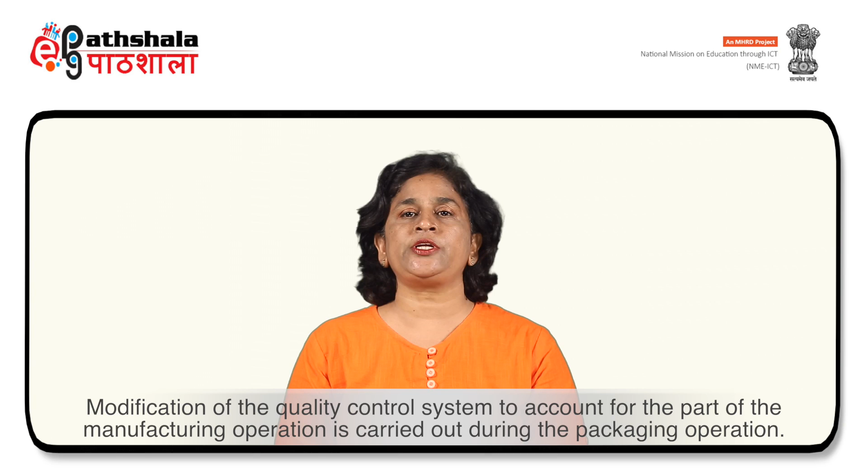Requirements for the preparation and packaging of pharmaceutical aerosols include special knowledge, skills and equipment, strict supervision and adherence to rigid quality controls, modification of the quality control system to account for the fact that part of the manufacturing operation is carried out during the packaging operation, the equipment used for compounding of liquid suspensions, emulsions, creams and ointments, and specialized equipment capable of handling and packaging materials at relatively low temperatures or under high pressure.

First of all, we will discuss the filling apparatus of pharmaceutical aerosols. There are three types of filling apparatus which include pressure filling apparatus, cold filling apparatus, and compressed gas filling apparatus.

Talking about pressure filling apparatus first: it comprises a pressure burette which meters small volumes of liquefied gas under pressure into an aerosol container. Pressure filling equipment that fills through pressure fillable metered valves is available. The pressure filling method comprises various steps, involving the addition of the propellant through the inlet valve located at the bottom or top of the burette.

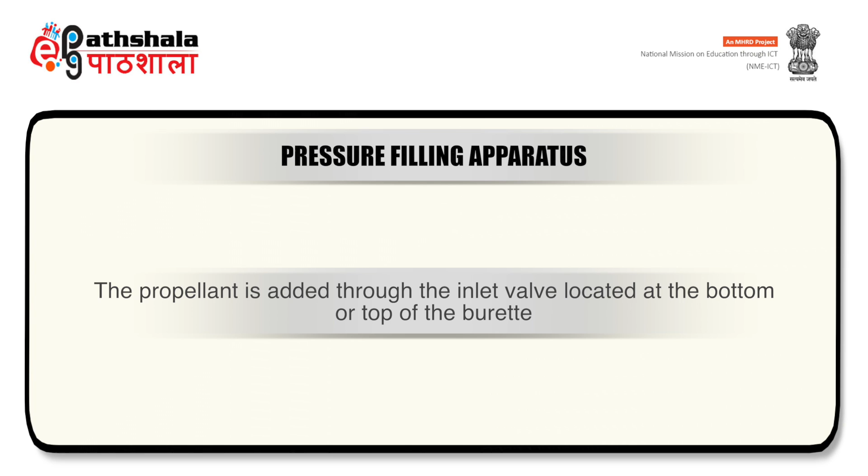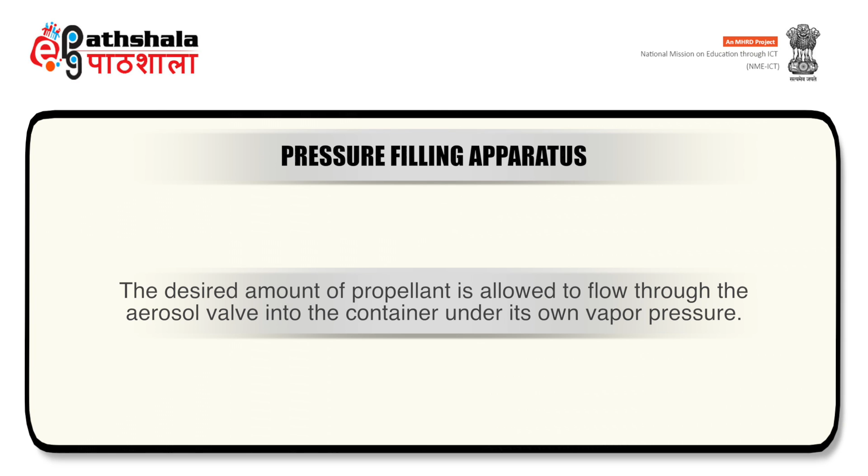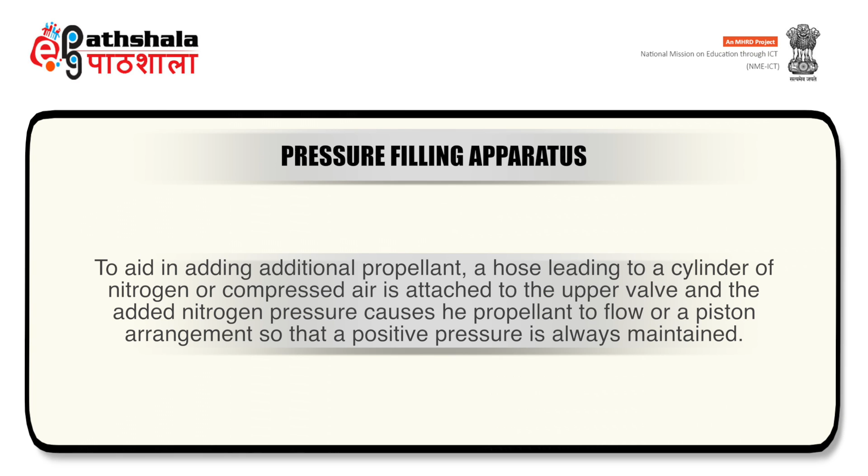Trapped air is allowed to escape through the upper valve. The desired amount of propellant is allowed to flow through the aerosol valve into the container under its own vapor pressure. When the pressure is equalized between the burette and the container, the propellant stops flowing. To help in adding additional propellant, a hose leading to a cylinder of nitrogen or compressed air is attached to the upper valve, and the added nitrogen pressure causes the propellant to flow, or a piston arrangement is made so that a positive pressure is always maintained.

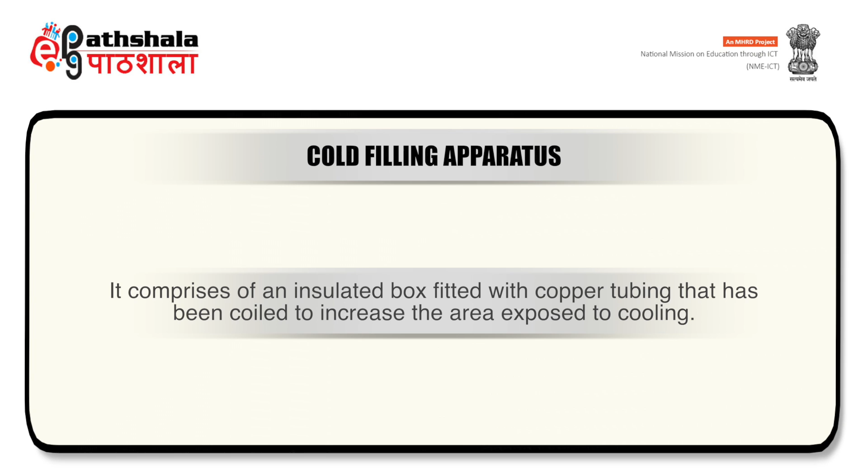Now talking about cold filling apparatus: it comprises an insulated box fitted with copper tubing that has been coiled to increase the area exposed to cooling. The unit must be filled with dry ice or acetone prior to use. This system can be used with metered valves as well as non-metered valves. However, it should not be used to fill hydrocarbon aerosols because an excessive amount of propellant escaping and vaporizing may lead to the formation of an explosive mixture. Fluorocarbon vapors do not form explosive or inflammable mixtures.

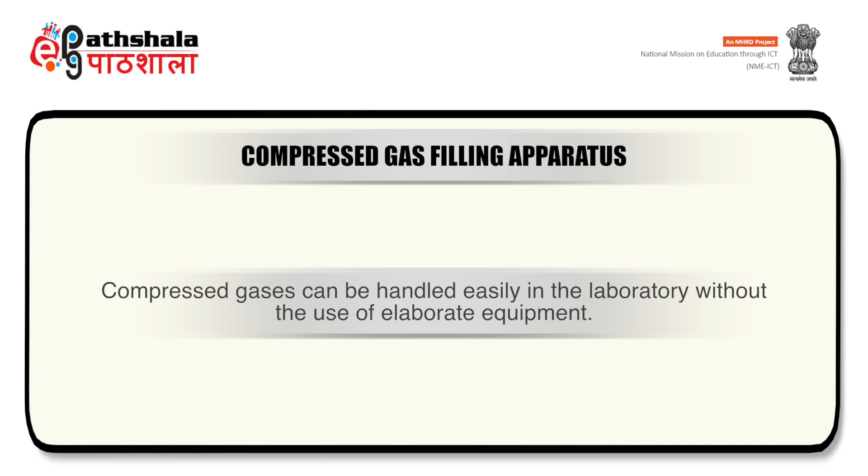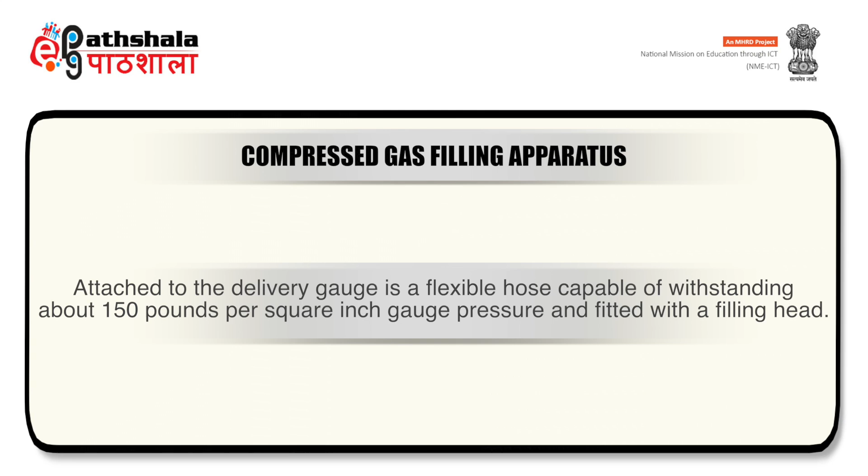Now the compressed gas filling apparatus: compressed gases can be handled easily in the laboratory without the use of elaborate equipment. Since the compressed gases are under high pressure, a pressure reducing valve is required. A flexible hose is attached to the delivery gauge and is capable of withstanding about 150 pounds per square inch gauge pressure, and is fitted with a filling head. More elaborate units utilize a flow indicator between the gauge and the flexible hose.

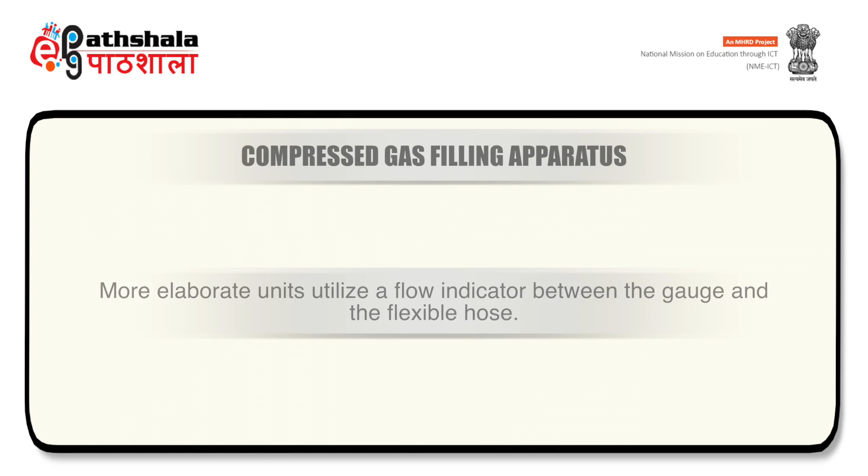Working of the equipment for filling aerosols with compressed gases involves various steps, including the placement of the concentrate in the container, the crimping of the valve in place, evacuation of the air by means of a vacuum pump, insertion of the filling head into the valve opening, and the depression of the valve so that the gas is allowed to flow into the container. When the pressure within the container is equal to the delivery pressure, gas stops flowing.

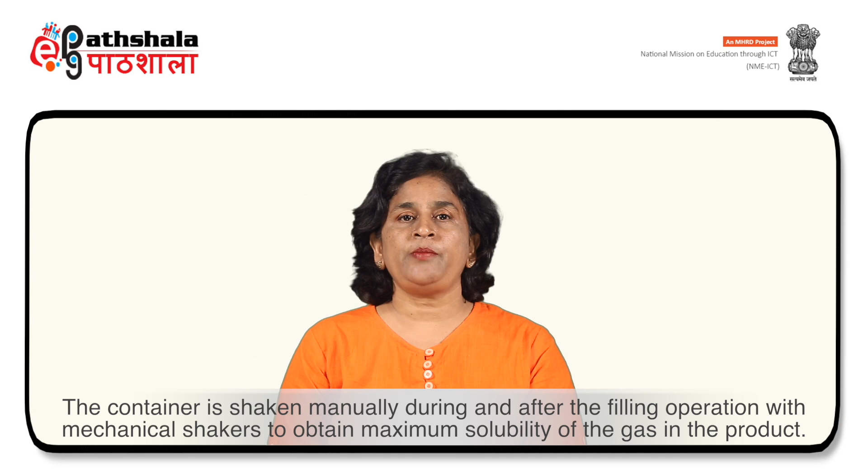Then the container is shaken manually during and after the filling operation, or with mechanical shakers, to obtain maximum solubility of the gas in the product. For products requiring an increased amount of gas, or for those in which solubility of the gas in the product is necessary, carbon dioxide and nitrous oxide can be used.

After having discussed the various filling apparatus used for pharmaceutical aerosols, now it is a turn to discuss the large scale equipment used for the manufacturing of pharmaceutical aerosols. The large scale equipment comprises of concentrate filler, valve placer, purger and vacuum crimper, pressure filler, and leak test tank.

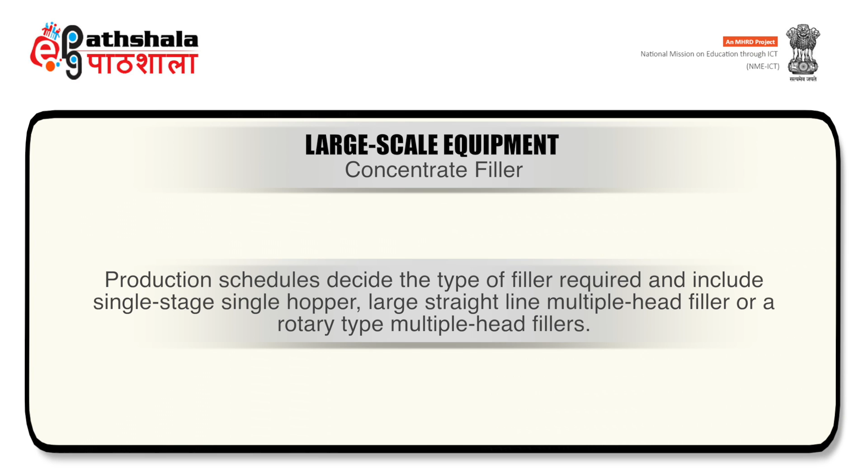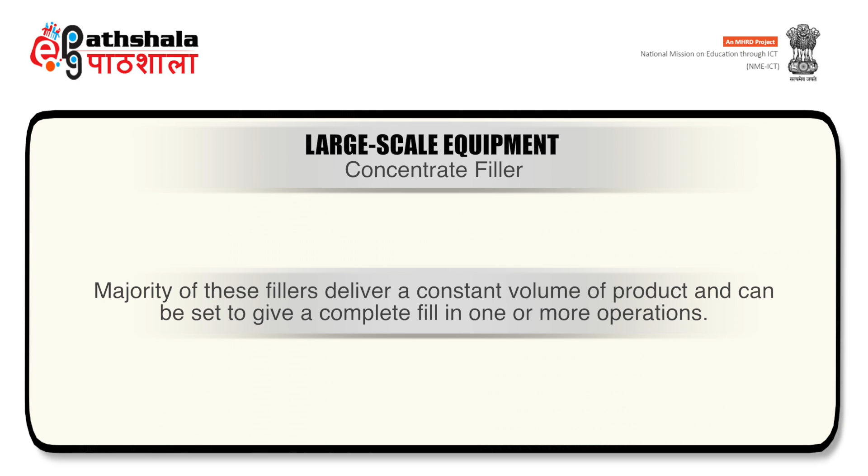Talking about concentrate filler first: production schedules decide the type of filler required, and include single stage single hopper, large straight line multiple head filler, or a rotary type multiple head filler. Majority of these fillers deliver a constant volume of product and can be set to give a complete fill in one or more operations. Generally, only part of the product is added at each stage, assuring a more accurate fill.

Now talking about valve placer: valves can be placed over the container either manually or automatically. High-speed equipment makes use of an automatic valve placer which orients the valve and places it in position prior to the crimping operation.

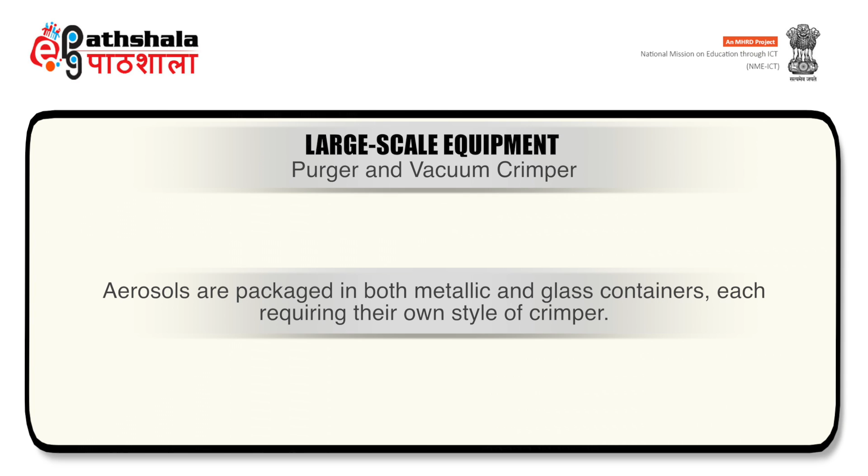Then comes purger and vacuum crimper. Aerosols are packaged in both metallic and glass containers, each requiring their own style of crimper. Combination can and bottle cappers can be used for most lab procedures and operate manually or on air pressure.

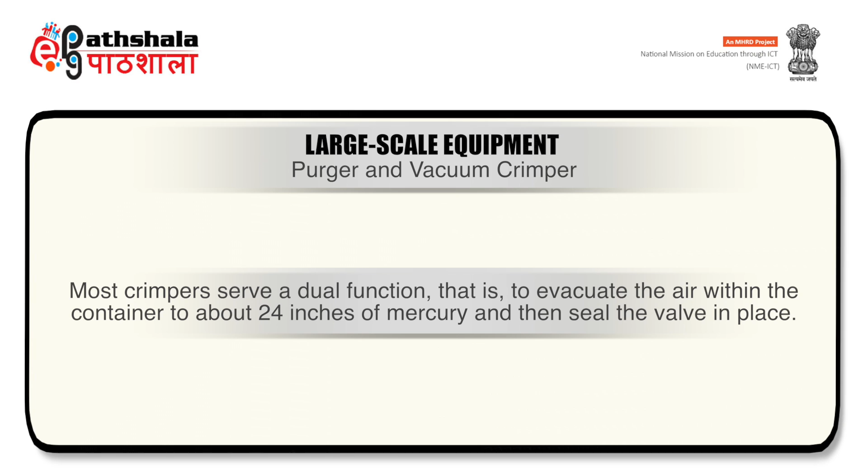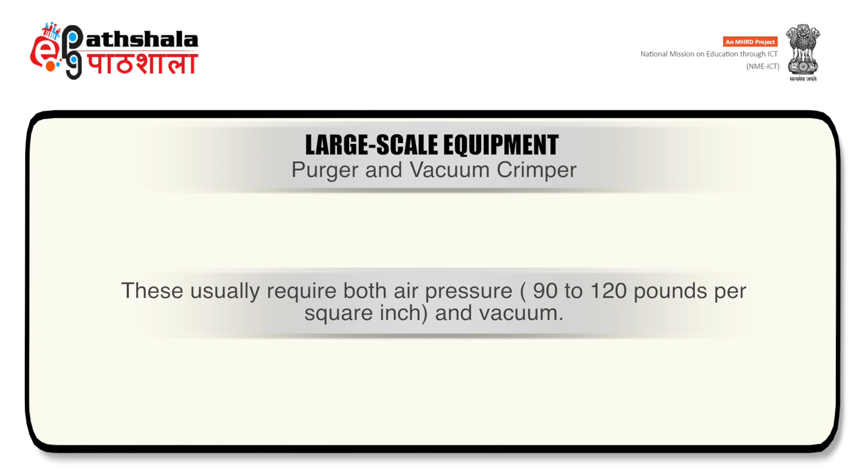These are capable of producing more than 10 to 12 cans per minute. Most crimpers serve a dual function, that is to evacuate the air within the container to about 24 inches of mercury and then seal the valve in place. Single head crimpers or multiple head rotary units capable of vacuum crimping up to 120 cans per minute are available.

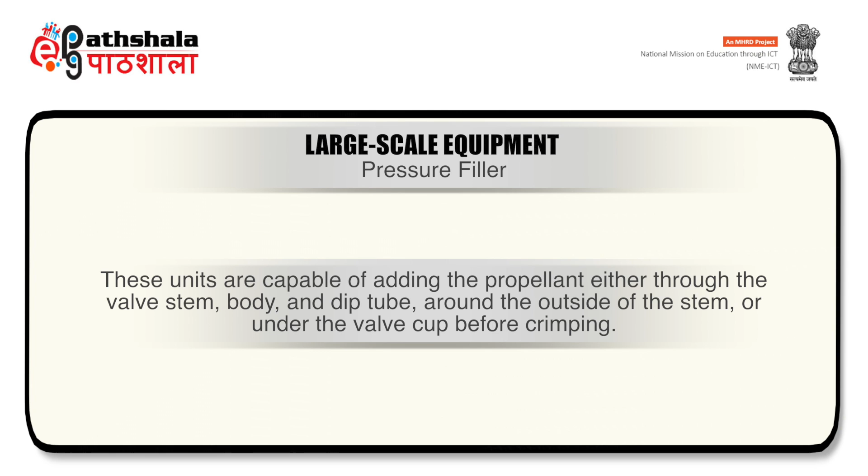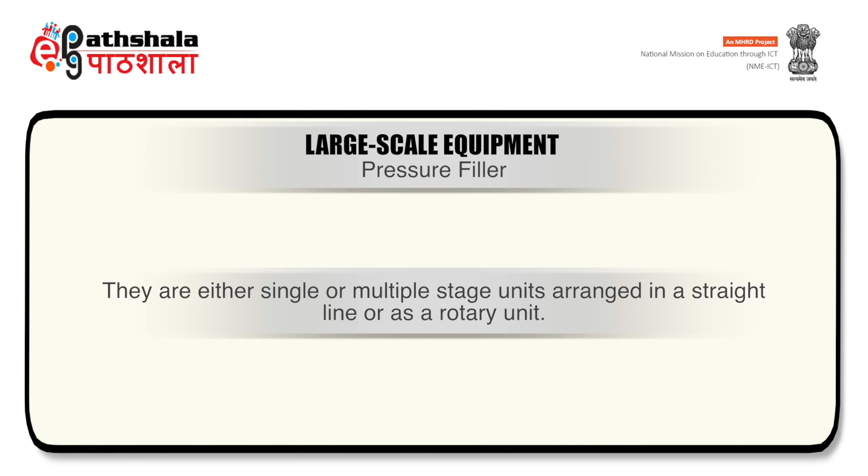These usually require both air pressure and vacuum. Now the pressure filler. Pressure filler units are capable of adding the propellant either through the valve stem body and dip tube, around the outside of the stem, or under the valve cup before crimping. They are either single or multiple stage units arranged in a straight line or as a rotary unit. To speed up production, a positive pressure is used to force the liquid propellant into the container.

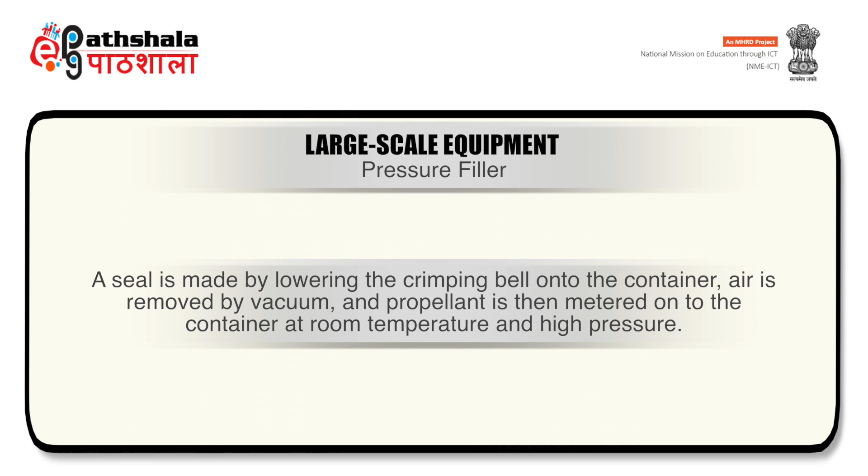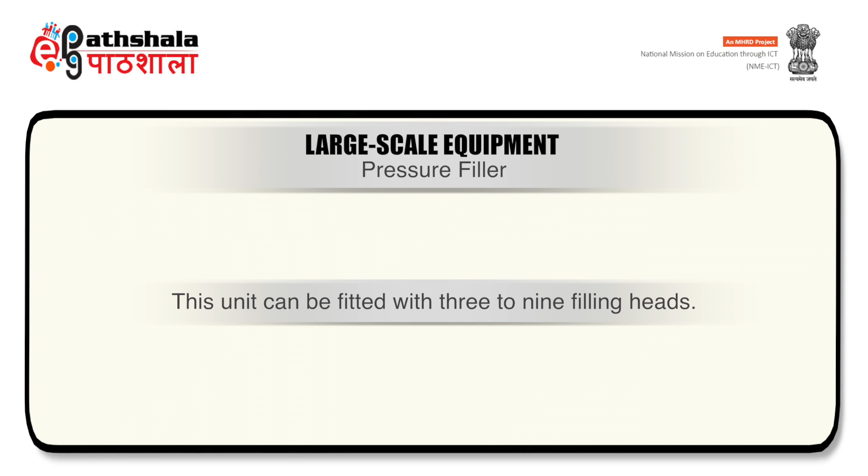Evacuation of air from the container, crimping the valve, and addition of the propellant can be achieved in basically one operation through the use of an under-the-cap filler. The pressure filling unit operates in a particular fashion which involves the following steps: a seal is made by lowering the crimping bell onto the container, air is removed by vacuum, and propellant is then metered into the container at room temperature and high pressure. The crimping collet expands and crimps the valve onto the opening. This unit can be fitted with 3 to 9 filling heads.

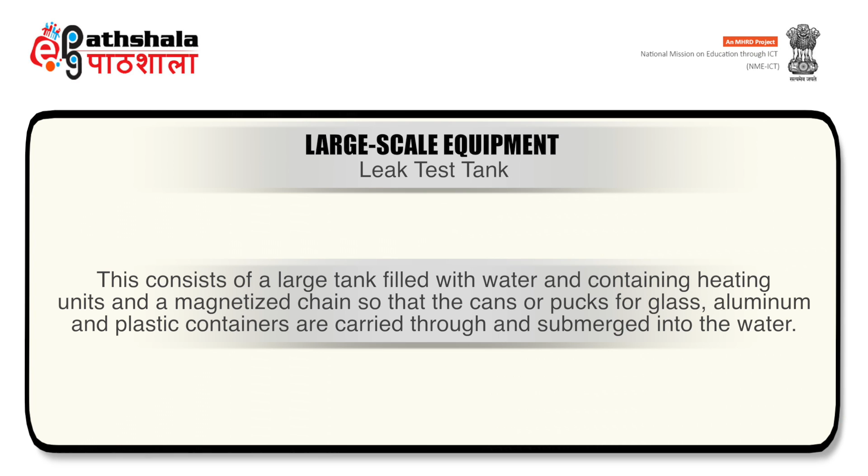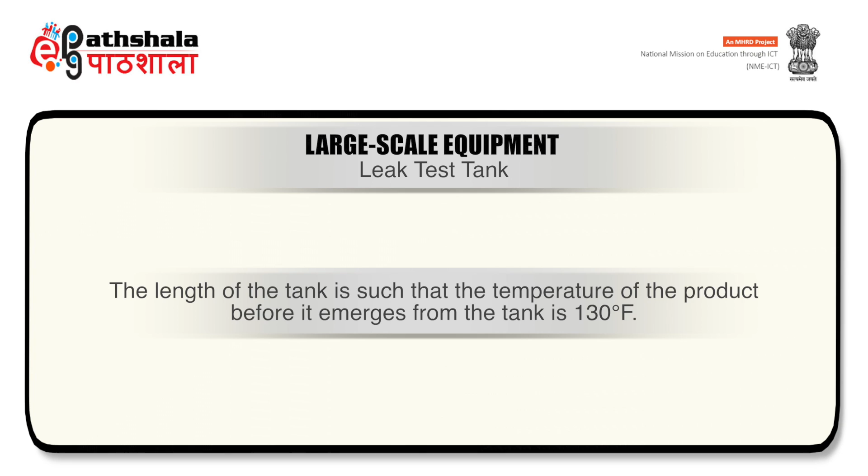Last but not least, talking about the leak test tank. This comprises a large tank filled with water and containing heating units and a magnetized chain so that cans, glass, aluminium and plastic containers are carried through and submerged into the water. The length of the tank is such that the temperature of the product before it comes out from the tank is 130 degrees Fahrenheit. According to DOT regulations, each completed container filled for shipment must have been heated until contents reach a minimum of 130 degrees Fahrenheit, or attain the pressure it would exert at this temperature, without evidence of leaking, distortion or other defects.

Now we shall discuss the manufacturing procedure.

Manufacture of aerosol products takes place in two stages, namely manufacture of concentrate and addition of propellant. Therefore, partial manufacturing operation takes place during the filling operation. Special quality control measures are required during filling so as to ensure that both concentrate and propellant are brought together in proper proportion. This we have discussed in the introduction. The aerosol concentrate is prepared as per generally accepted procedures, and a sample is tested to save time and money. A rejected batch is corrected instead of discarding, and thus loss of the other components is prevented.

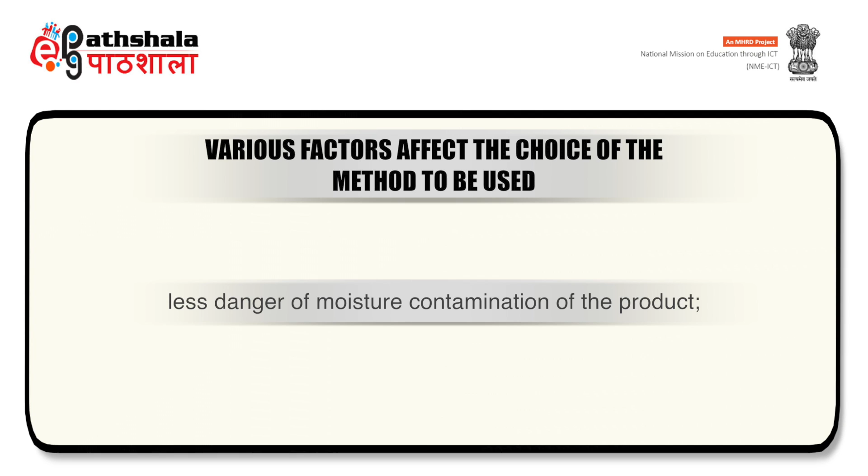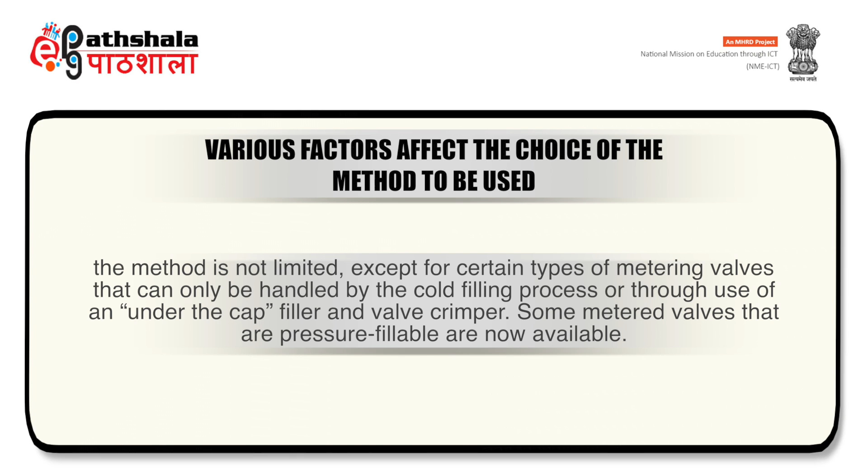Two methods which have been developed for filling aerosol products are pressure filling and cold filling. Various factors affect the choice of method to be used. The pressure method is usually preferred over the cold method because of the less danger of moisture contamination of the product, achievability of high production speeds, loss of less propellant, and the method is not limited, except for certain types of metering valves that can only be handled by the cold filling process or through use of an under-the-cap filler and valve crimper. Some metered valves that are pressure fillable are now available.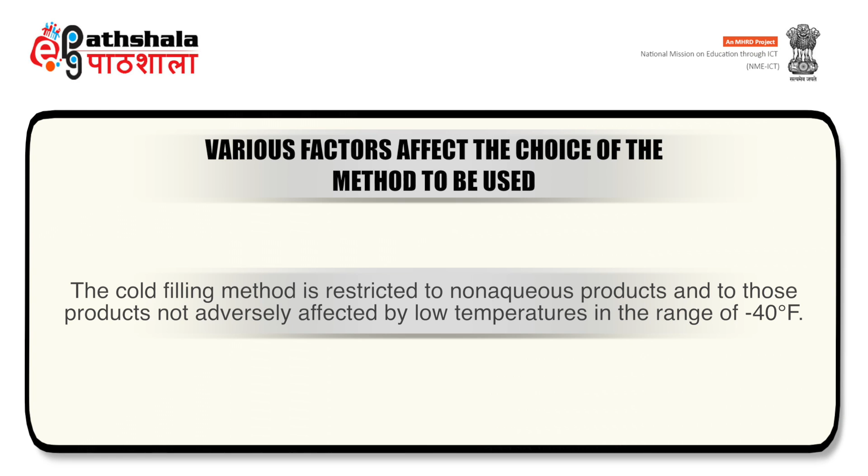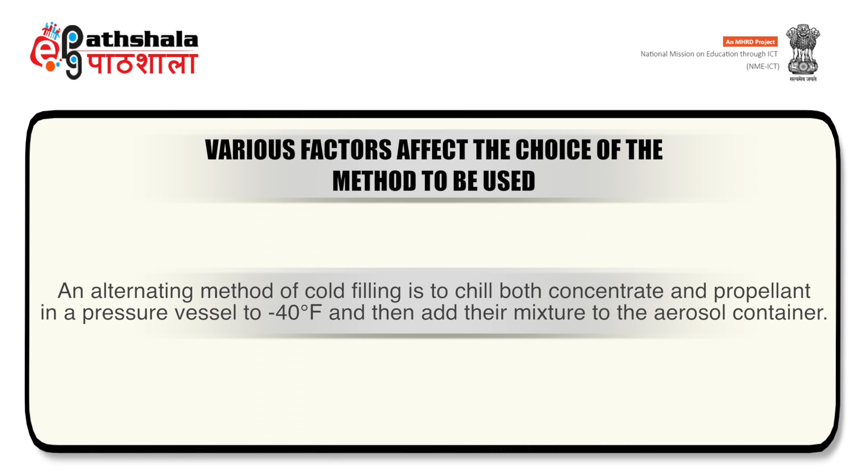Cold filling method, on the other hand, is restricted to non-aqueous products and to those products which are not adversely affected by low temperatures in the range of minus 40 degrees Fahrenheit. In this method, product concentrate is chilled to minus 40 degrees Fahrenheit and added to the chilled container. The chilled propellant is then added in one or two stages depending on the amount. An alternate method of cold filling is to chill both the concentrate and propellant in a pressure vessel to minus 40 degrees Fahrenheit and then add their mixture to the aerosol container. A valve is then crimped in place.

The container passes through a heated water bath in which the contents of the container are heated to 130 degrees Fahrenheit to test for leaks and strength of container. The container is air dried, spray tested if necessary, capped and labeled. This filling method is no longer used to any great extent and has been replaced by the pressure filling method.

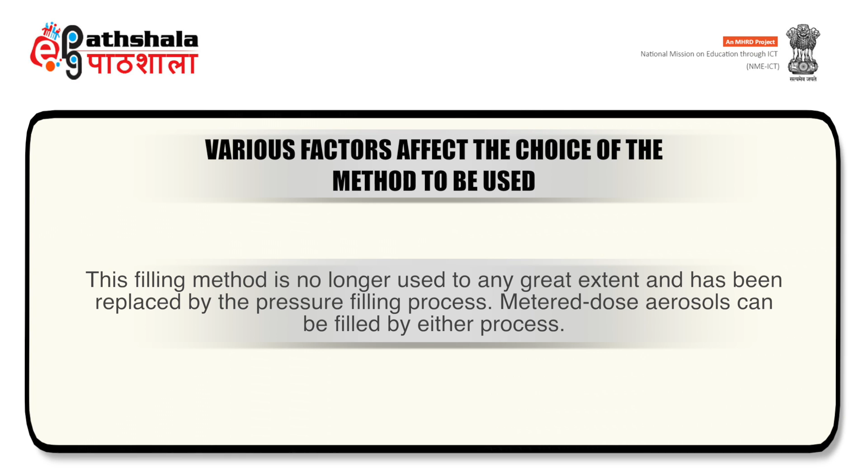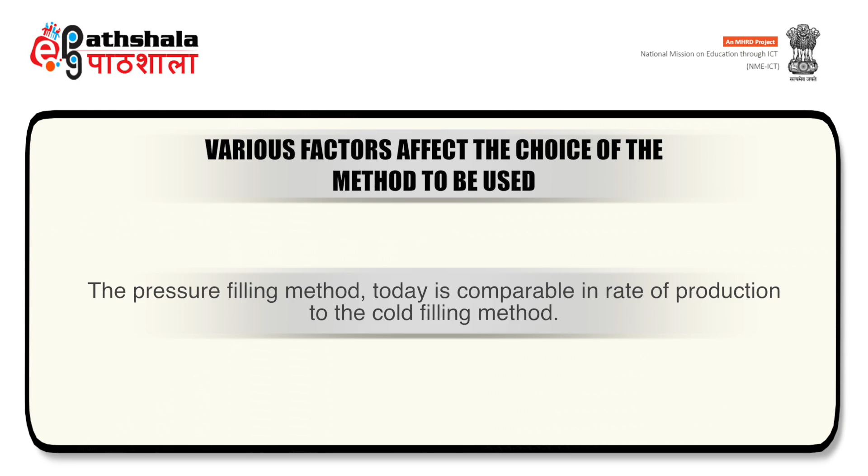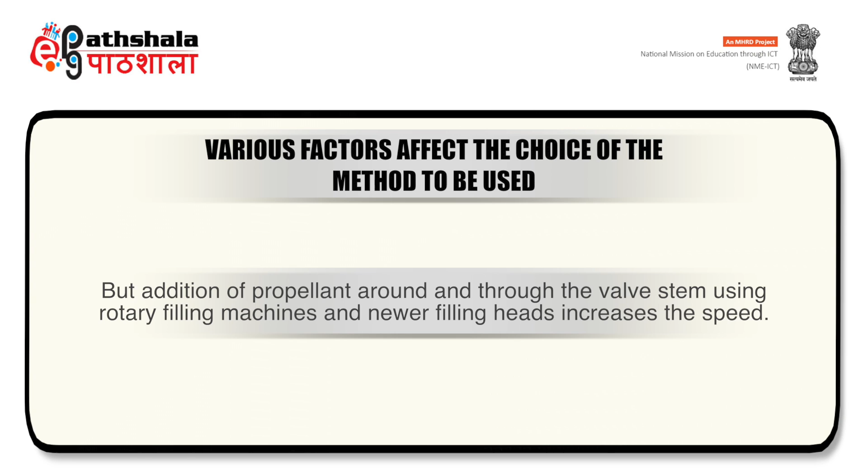Metered dose aerosols can be filled by either of the processes. Presently, the pressure filling method is comparable in rate of production to the cold filling method. Concentrate is added to the container at room temperature and the valve is crimped in place. Propellant is added through the valve or under the cap. This step is slow and limits production, but addition of propellant around and through the valve stem using rotary filling machines and newer filling heads increases the speed. For products which are adversely affected by air that may be trapped within the container, air in the headspace is evacuated prior to adding the propellant.

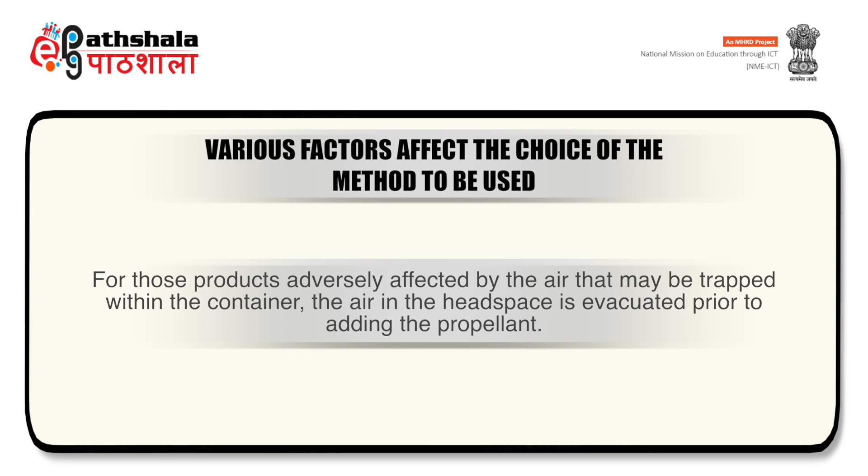Following the addition of the propellant, the method becomes similar to the cold filling method. Following the development of the aerosol, an initial production run of about 500 to 1000 units is scheduled as per the specifications of the pharmaceutical concern. These units are used for additional stability studies and for determining incompatibilities with various components of the aerosol container. This run also helps identify problems that may arise in developing the product from laboratory to full production.

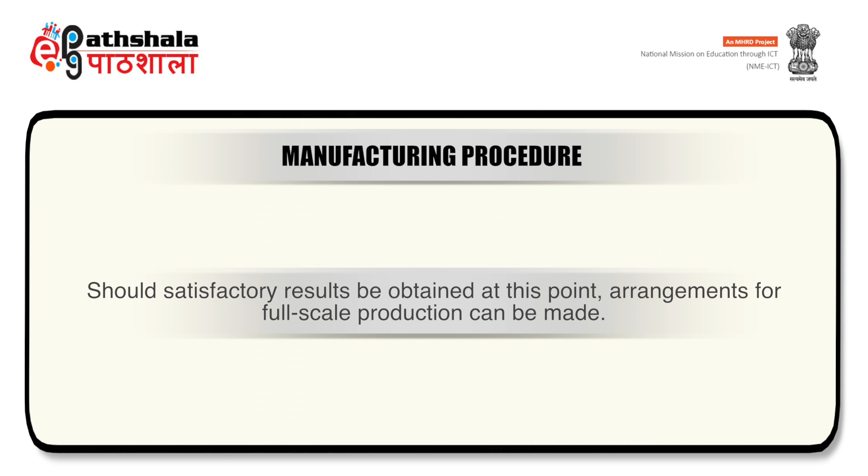A larger run of 10,000 to 25,000 units is scheduled next. All materials and equipment used are identical to those utilized for the production run. These samples can be used for clinical studies and further testing if necessary. This test run should give information including the suitability of scale-up operation, number of rejects to be expected, limitations of the filling process, determination of equipment to be used, and a check on the effectiveness and acceptability of the final product. If satisfactory results are obtained at this point, arrangements for full-scale production can be made.

After having discussed the manufacturing of pharmaceutical aerosols, it is now time to discuss quality control for pharmaceutical aerosols. First of all, quality control of propellants will be discussed.

Propellants used in medicinal and pharmaceutical aerosols require special handling and in many cases special test procedures. All propellants are shipped to the user with accompanying specification sheets. However, before the propellant is used, and even before it is piped into a storage tank, it is subjected to the same rigid tests necessary for all other raw materials. To begin with, a sample is removed and sent to the laboratory, and the vapor pressure of the sample is determined and compared to the specifications.

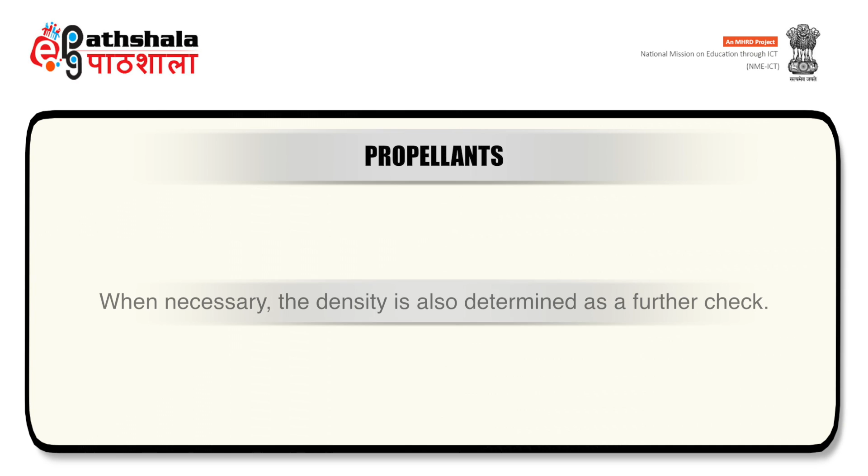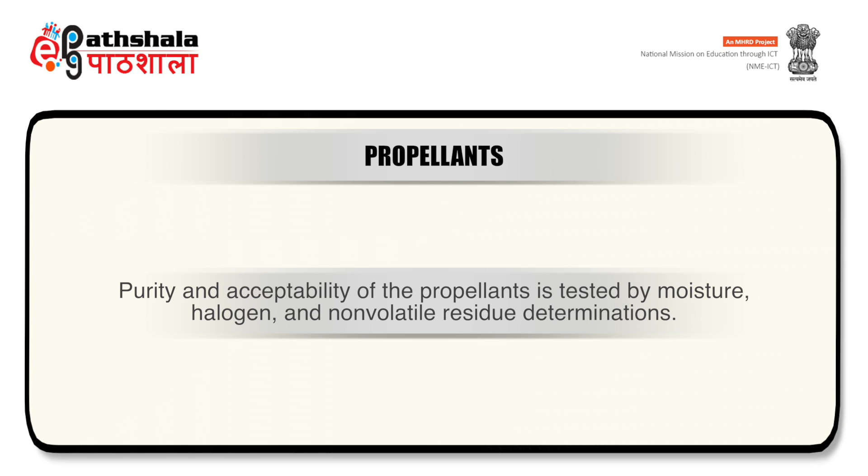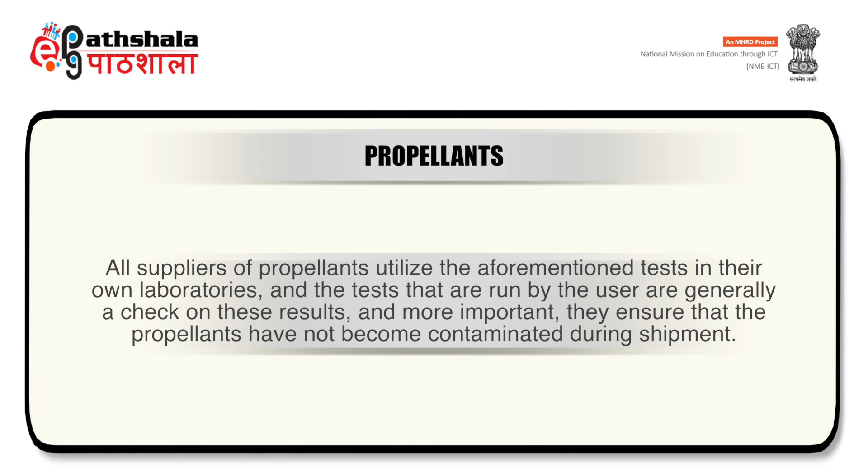When necessary, the density of the propellant is also determined as a further check. Gas chromatography is used to determine the identity of the propellant, and when a blend of propellants is used, to determine the composition. Last but not least, purity and acceptability of the propellants is tested by moisture, halogen, and non-volatile residue determinations. Depending on the end use of the propellant, several of these tests may be more important than others. All suppliers of propellants utilize these tests in their own labs, and the tests run by the user are generally a check on these results, and more importantly, ensure that propellants have not become contaminated during shipment.

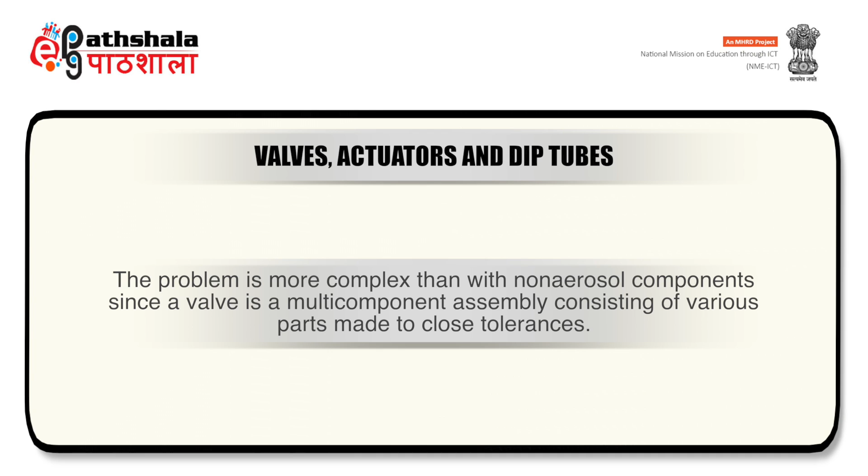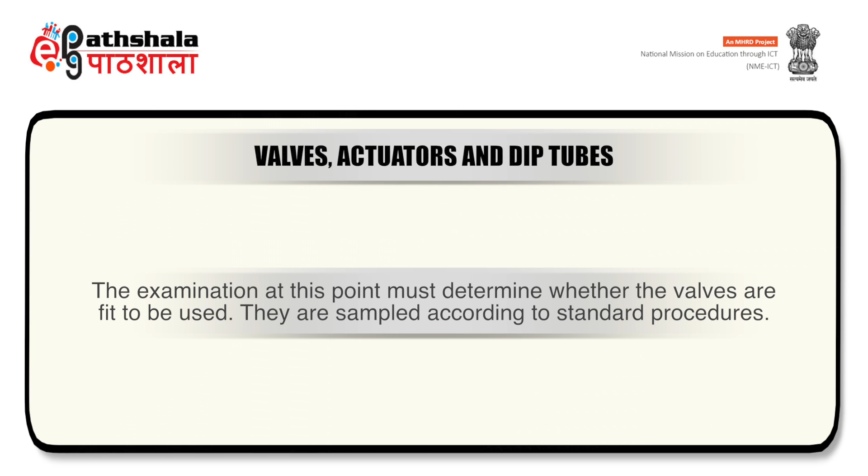Now, the quality control of valves, actuators, and dip tubes. These parts are subjected to both physical and chemical inspection, and the problem is more complex than with non-aerosol components because a valve is a multi-component assembly comprising various parts made to close tolerances. Examination at this point must determine whether the valves are fit to be used or not. They are sampled according to standard procedures. A manufacturer of aerosols actually assembles valves using component parts having similar tolerances, to ensure that parts having minimum tolerance do not engage with parts approaching maximum tolerance.

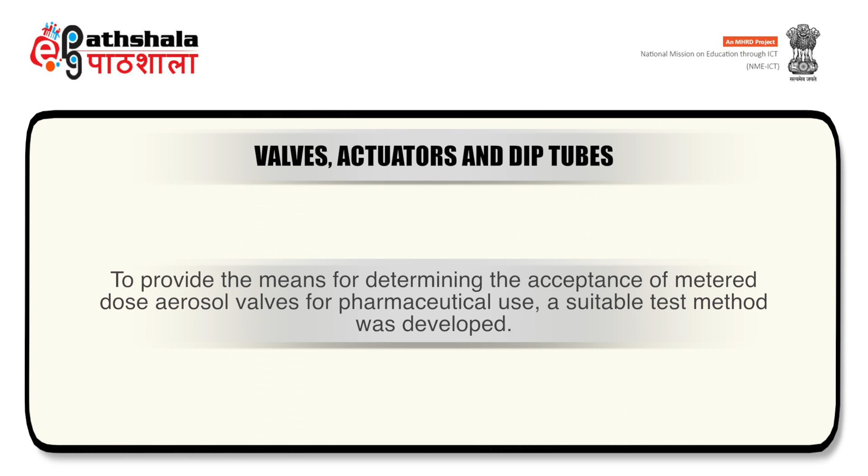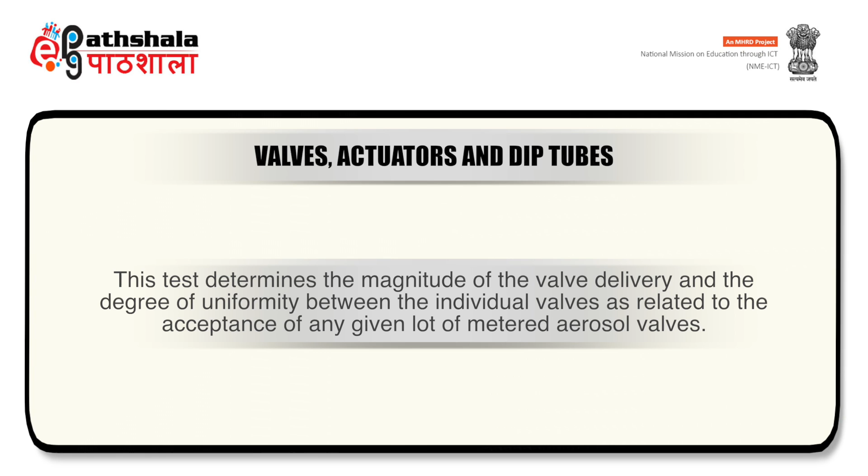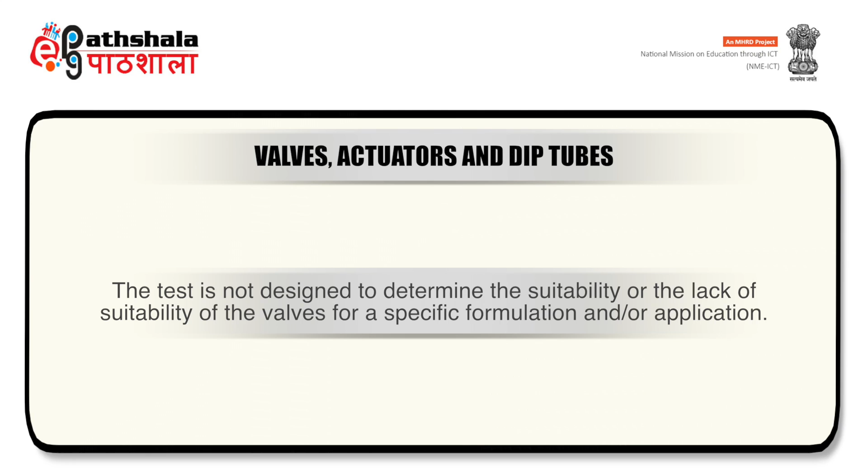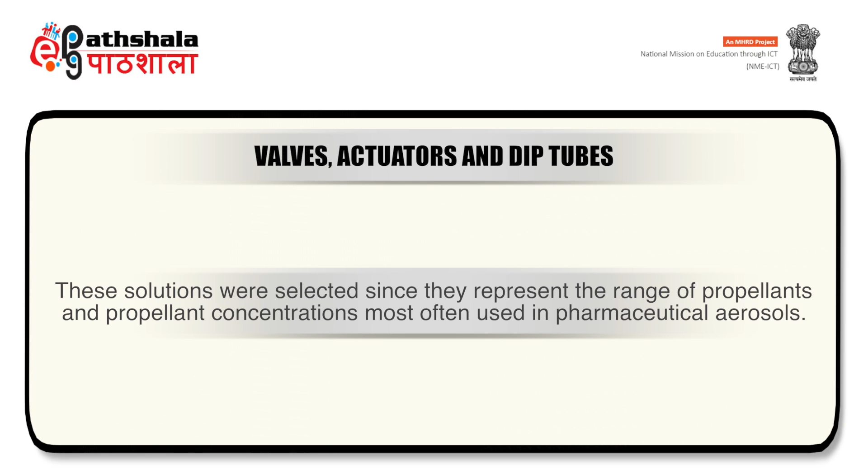To provide the means for determining the acceptance of metered dose aerosol valves for pharmaceutical use, a suitable test method has been developed. The test determines the magnitude of the valve delivery and the degree of uniformity between individual valves as related to the acceptance of any given lot of metered aerosol valves. The test is not designed to determine the suitability or lack of suitability of the valves for a specific formulation and application. Three test solutions were proposed to rule out variations in valve delivery brought about by different formulations. These test solutions represent the range of propellants and propellant concentrations most often used in pharmaceutical aerosols.

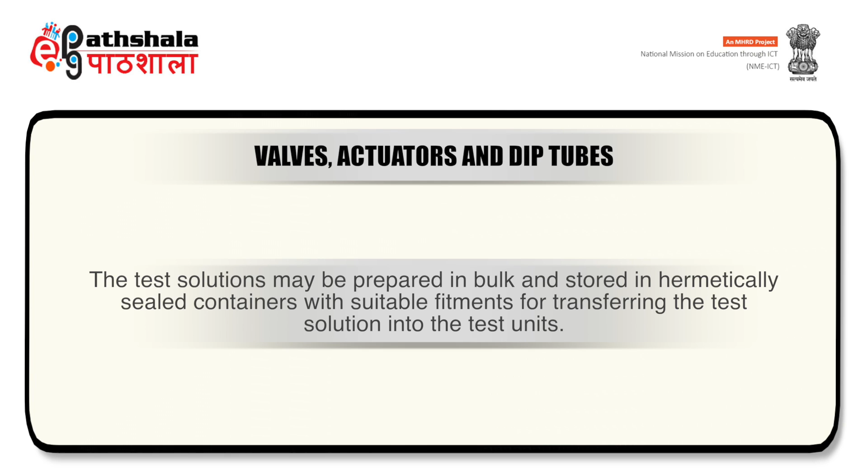Since a metered valve delivers a specific volume of liquid with each actuation, it was proposed that metered valve delivery should be designated in terms of valve delivery, expressed as volume in microliters. In such a case, the recommended test solutions would apply to the control of valve delivery and uniformity for a great variety of formulations of different densities. The test solutions may be prepared in bulk and stored in hermetically sealed containers with suitable fitments for transferring the test solution into test units. Transfer of the test solution should be made so that no change occurs in the proportions of the ingredients.

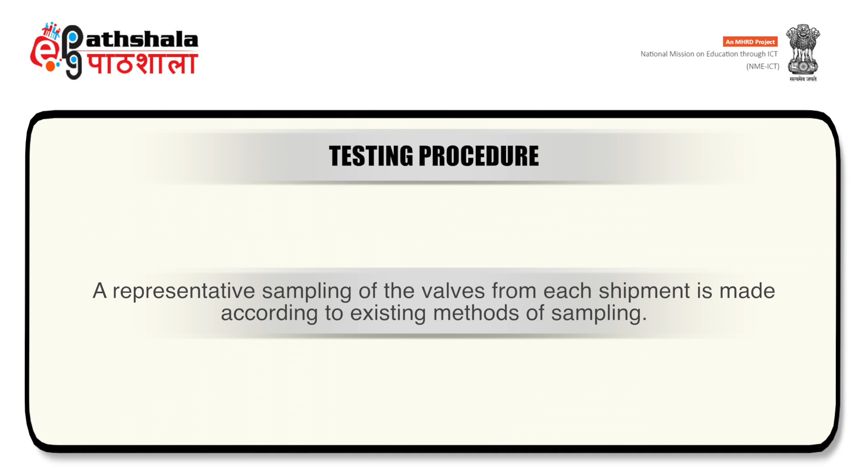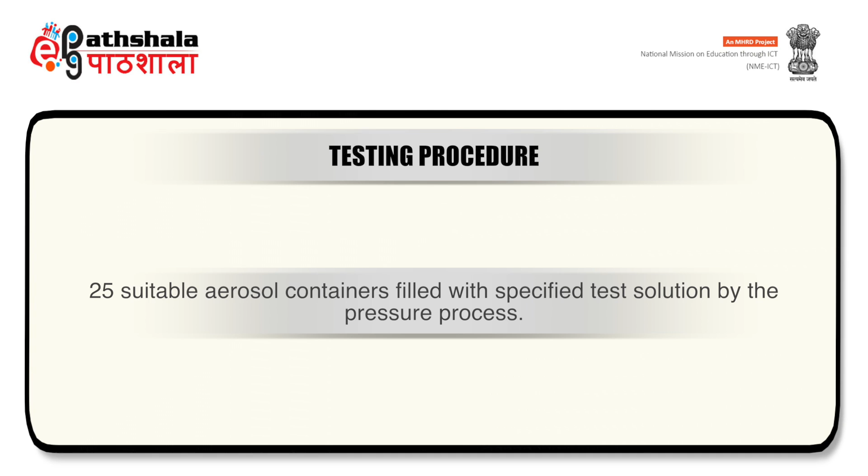Now we will discuss the testing procedure. A representative sampling of the valves from each shipment is made according to existing methods of sampling, and the test is conducted comprising several steps, including filling 25 suitable aerosol containers with the specified test solution by a pressure process. A button type actuator with a 0.021 inch or larger unrestricted orifice is attached. The second step involves selection of 25 valves and their placement onto these containers. The actuator button remains in place throughout the test procedure.

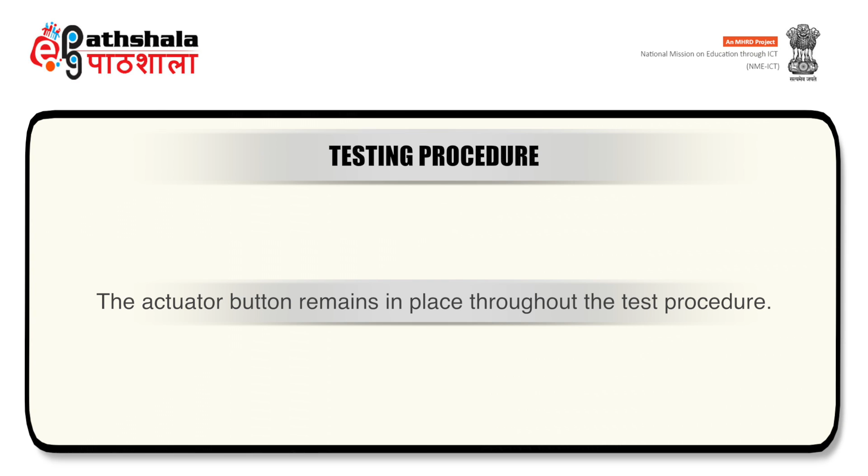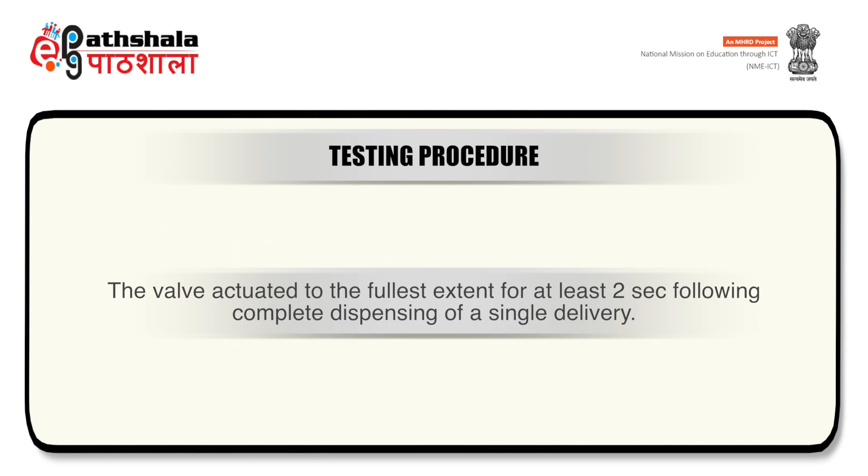Then the containers are placed in a suitable atmosphere at a temperature of 25 plus minus 1 degree Celsius. The product attains this temperature. Then the valve is actuated to the fullest extent for at least 2 seconds following complete dispensing of a single delivery. This procedure is repeated for a total of 10 times.

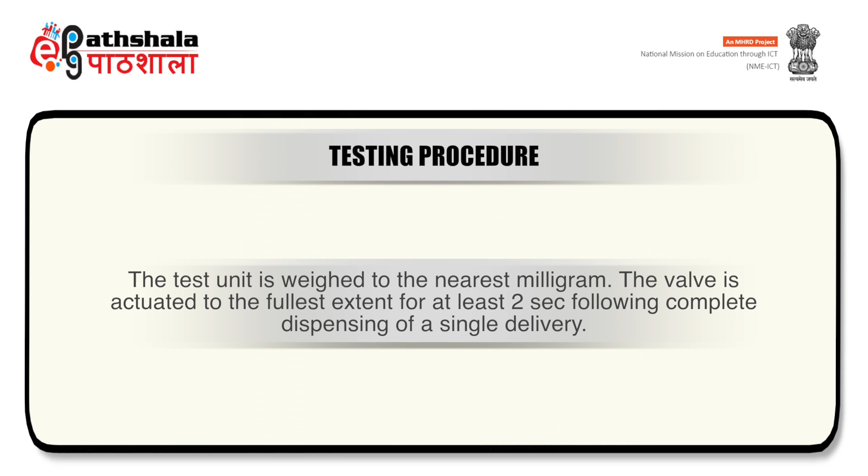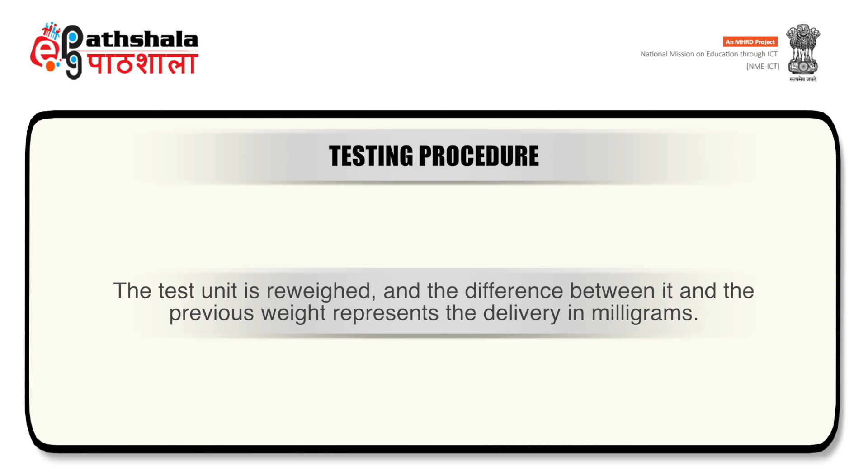Test unit is weighed to the nearest milligram. Valve is actuated to the fullest extent for at least 2 seconds following complete dispensing of a single delivery. Test unit is reweighed and the difference between it and the previous weight represents the delivery in milligrams. This test procedure is repeated for a total of 2 individual deliveries from each of the 25 test units.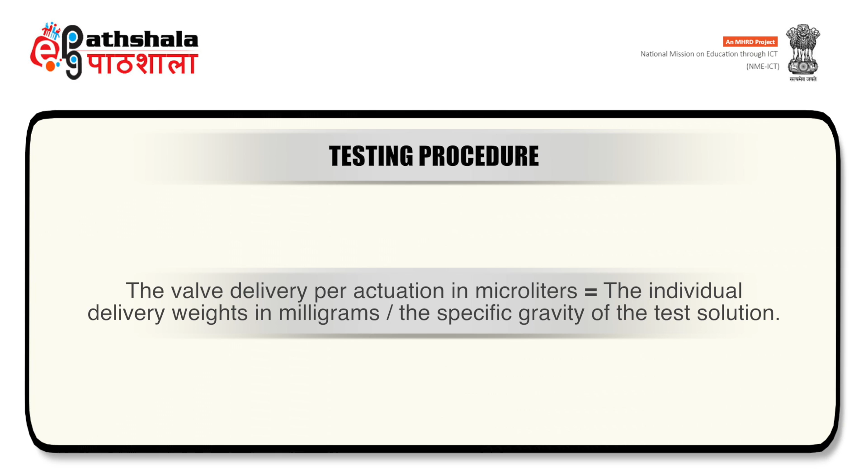Valve delivery per actuation in microliters is equal to individual delivery weight in milligrams divided by the specific gravity of the test solution. This test procedure applies to two categories of metered aerosol valves having certain limits: one with a limit of plus minus 15% for valves delivering 54 microliters or less, and limits of plus minus 10% for valves delivering 55 to 200 microliters.

The test procedure involves various steps. The first step involves rejection of the valves if, out of 50 individual deliveries, more than or equal to 4 are outside the limits for the specified valve delivery.

If 3 individual deliveries are outside the limits, another 25 valves are sampled and the test is repeated. The lot is rejected if more than one delivery is outside the specifications.

If 2 deliveries from one valve are beyond the limits, another 25 valves should be taken. The lot is accepted if not more than one delivery is outside the specifications.

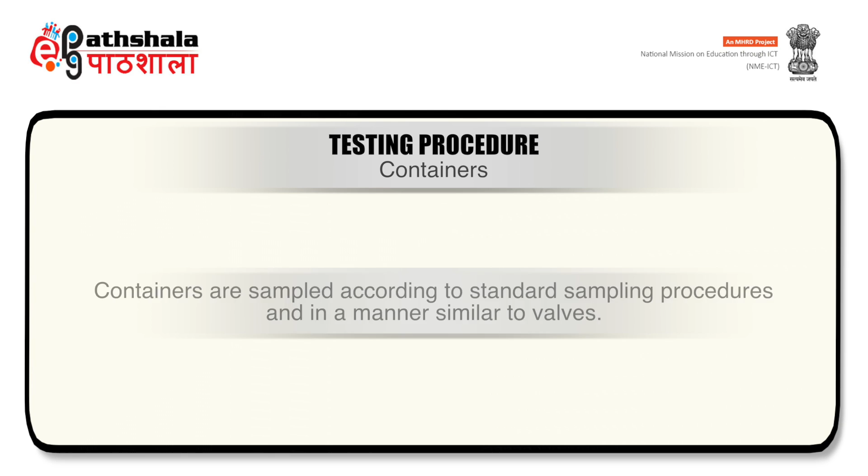Now, the test for containers. Containers are sampled according to standard sampling procedures and in a manner similar to the valves. Both uncoated and coated metal containers must be examined for defects in the lining.

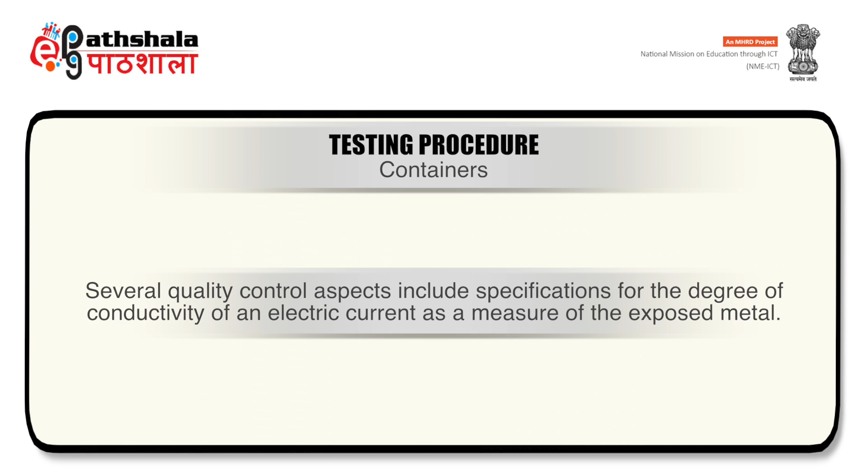Several quality control aspects include specifications for degree of conductivity of an electric current as a measure of the exposed metal. Glass containers must be examined for flaws.

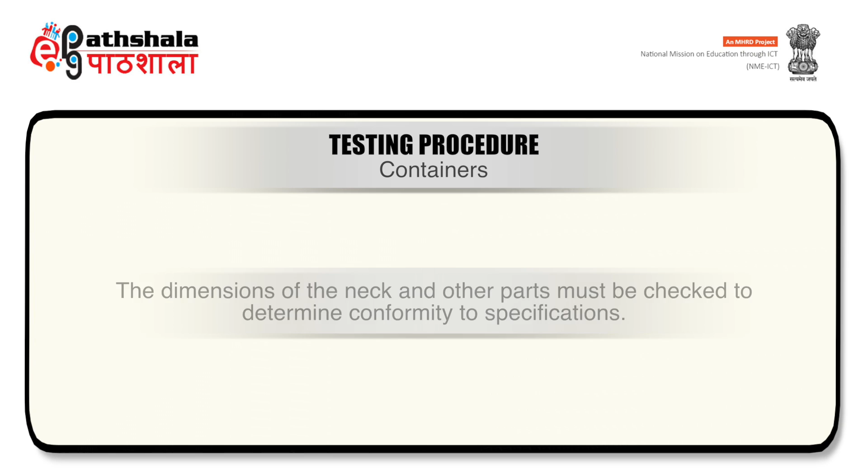The dimensions of the neck and other parts must be checked to determine conformity to the specifications. The weight of the bottle should also be determined.

Now, weight checking. Weight checking is generally accomplished by periodically adding to the filling line a few empty aerosol containers, which after being filled with the concentrate are removed and then accurately weighed. The same procedure is used to check the weight of the propellant being added.

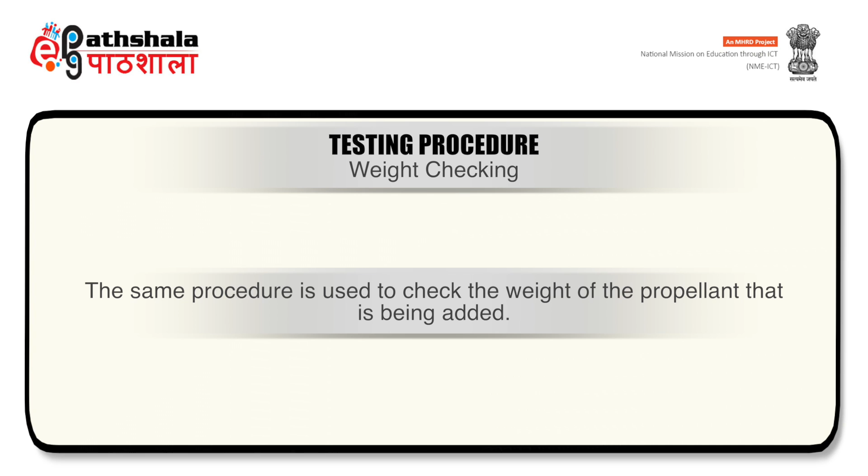When a propellant blend is being used, checks must be made to ensure a proper blend of propellants. As a further check, the finished container is weighed to check the accuracy of the filling operation.

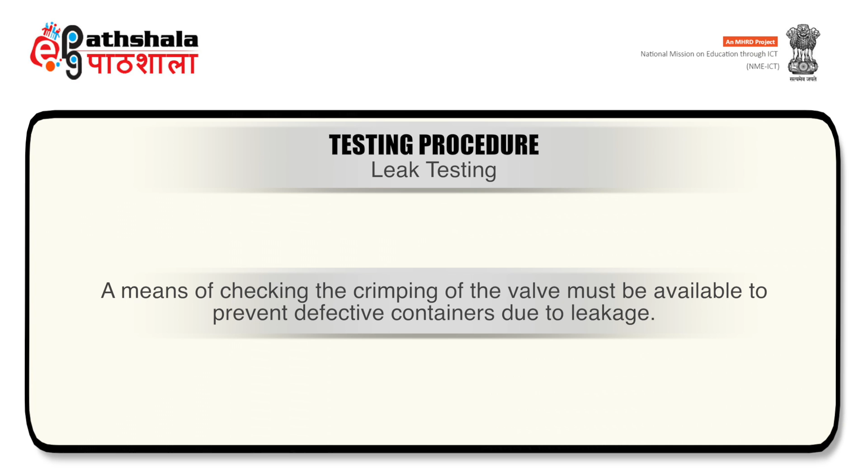Now, leak testing. A means of checking the crimping of the valve must be available to prevent defective containers due to leakage. For metal containers, this is achieved by measuring the crimp dimensions and ensuring that they meet specifications.

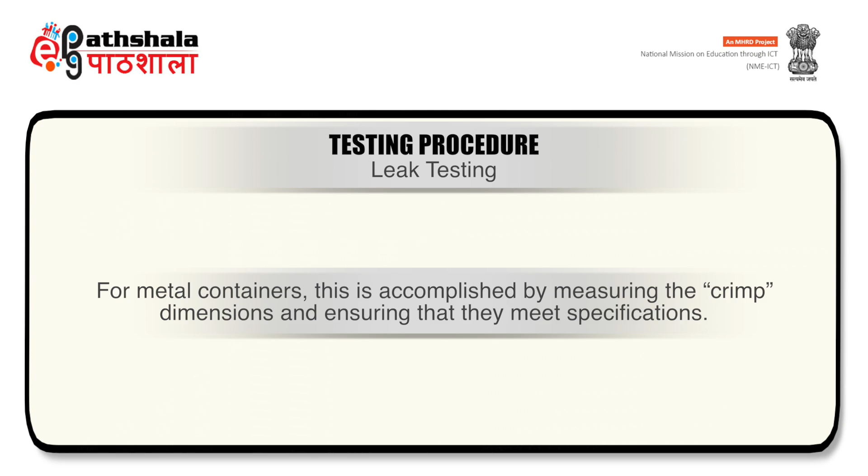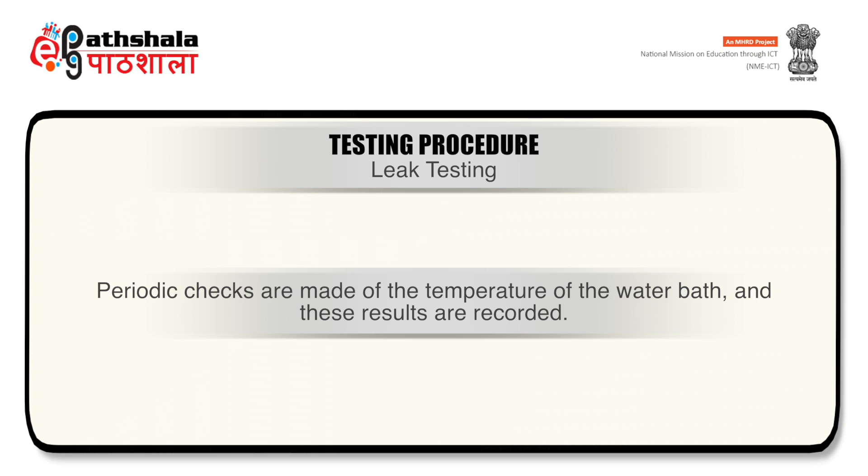Final testing of the efficiency of the valve closure is accomplished by passing the filled containers through a water bath. Periodic checks are made of the temperature of the water bath and these results are recorded.

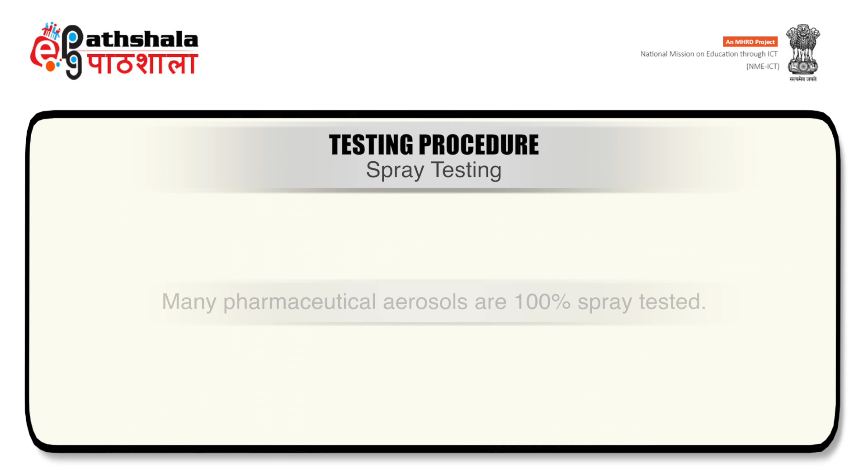Now, spray testing. Many pharmaceutical aerosols are 100% spray tested. This serves to clear the dip tube of pure propellant and pure concentrate, and to check for defects in the valve and the spray pattern. For metered valves, it serves to prime the valve so that it is ready for use by the consumer.

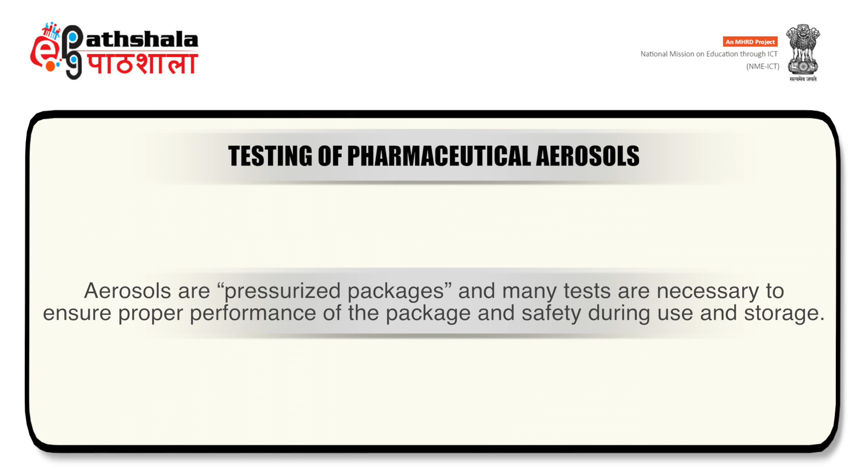Now, the testing of pharmaceutical aerosols. As we know, aerosols are pressurized packages, and many tests are required to ensure proper performance of the package and safety during use and storage.

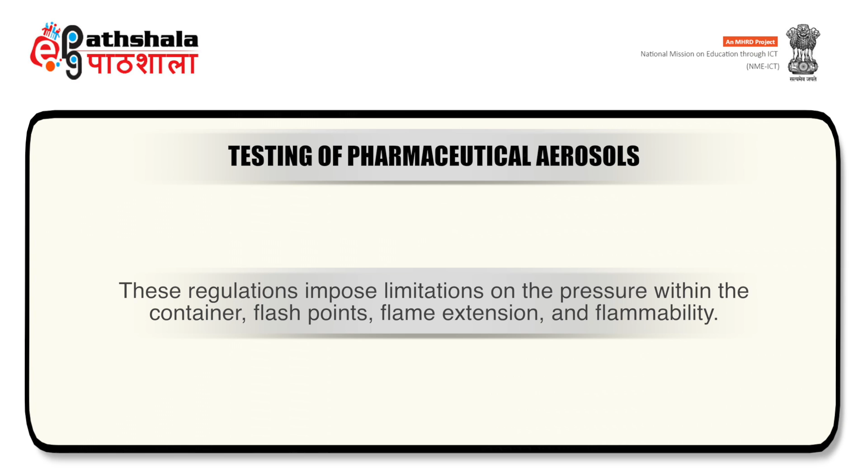All aerosol products that are shipped in interstate commerce are subject to the regulations of the DOT. These regulations impose limitations on the pressure within the container, flash points, flame extension and flammability. The provisions of the Hazardous Substances Labeling Act and Food, Drugs and Cosmetics Act must be applied.

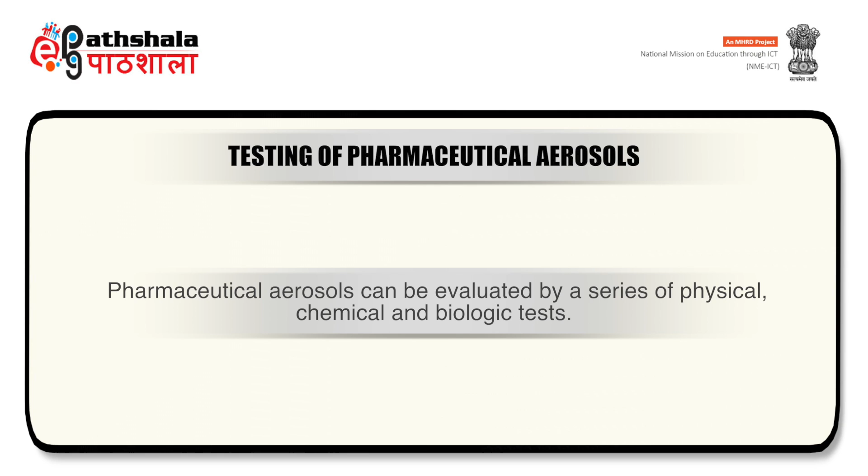Pharmaceutical aerosols can be evaluated by a series of physical, chemical and biological tests. Evaluation for physicochemical characteristics involves testing the concentrate-propellant ratio, identifying the propellant, and determining moisture content.

Density and vapor pressure. Performance evaluation includes tests for spray pattern, aerosol valve discharge rate, dosage with metered valve, net contents, foam stability, particle size determination and leakage test. And lastly, the biological characteristics.

So friends, in this module of pharmaceutical aerosols part 2, manufacturing, we learned the requirements for manufacturing pharmaceutical aerosols and various types of apparatus for filling pharmaceutical aerosols, including pressure filling apparatus, cold filling apparatus and compressed gas filling apparatus. After learning about these apparatus, we also discussed large scale equipment for manufacturing. It was followed by a discussion on the 2 stages of manufacturing of aerosols.